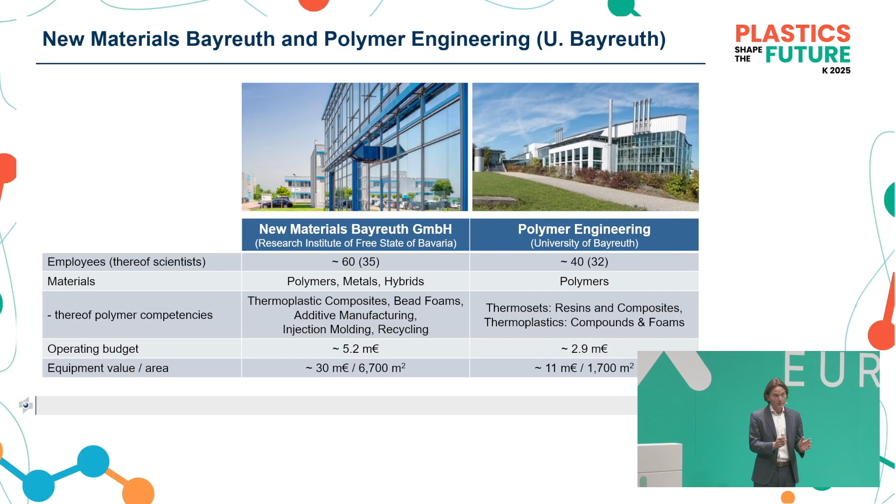And that's, I think, very important, at least to understand each other's language. So before getting started, you already mentioned that I have different roles in Bayreuth. One of the roles, I'm heading the Department of Polymer Engineering, a chair at the university with about 40 people. But I'm also CEO of the company New Materials Bayreuth with about 60 people. Both research-driven, and sustainability plays a quite important role here.

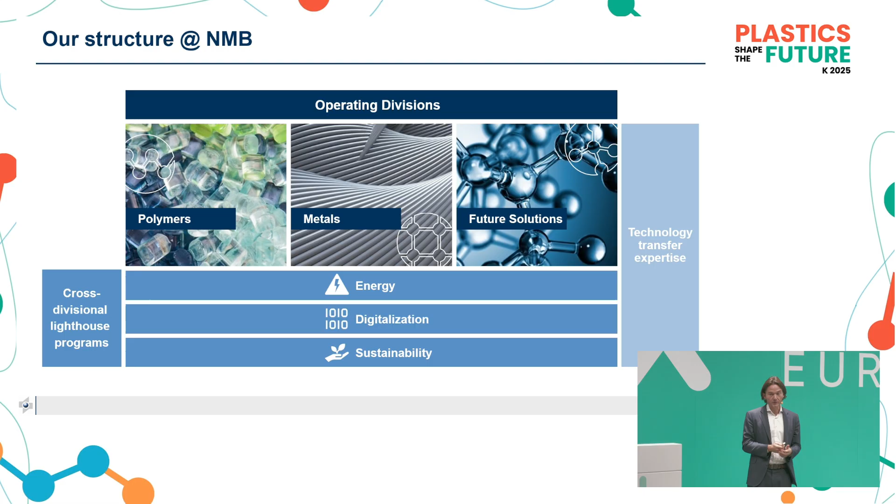An important one is that we organize ourselves in material classes, also including metals, by the way. But digitalization and sustainability, circular economy are across the different materials, because often in applications you have multi-materials. And that's why it's needed to have that general overview. We are not doing research just for doing research, but we are committed to application. We are interested always to apply it later on so that our customers, our partners can earn money.

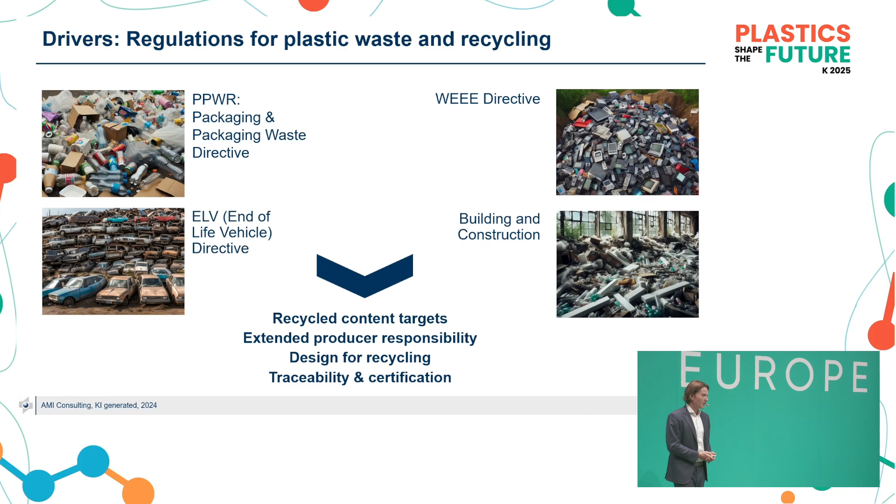But now let's step into the topic of sustainability and circular economy. So what are the drivers? And I think all of you are aware of it. A very strong driver is regulation. There are different regulations, directives in place or getting into place, which demand for a certain share of recycled product, for an extended producer responsibility, for design for recycling, and so on. Without regulation, we would perhaps not discuss so intensely about the topic of circular economy. But there are also other drivers.

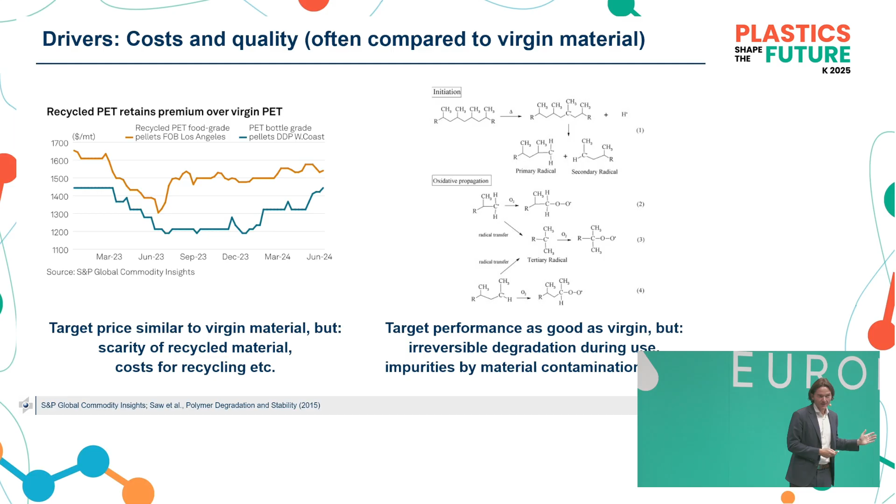The first one is quality. Can we afford to reduce the quality? No, we can't. So it should be at the same quality as before. But we all know that when you're recycling a material several times, due to degradation, the material properties might decline. And the other one is, for sure, the most important material characteristic: costs. Ideally, you would have, at a certain quality, virgin material quality, the identical costs. Due to scarcity in the market, often we see that recycled material is more expensive than virgin material if it's good quality. And that is also an issue which demands for solutions.

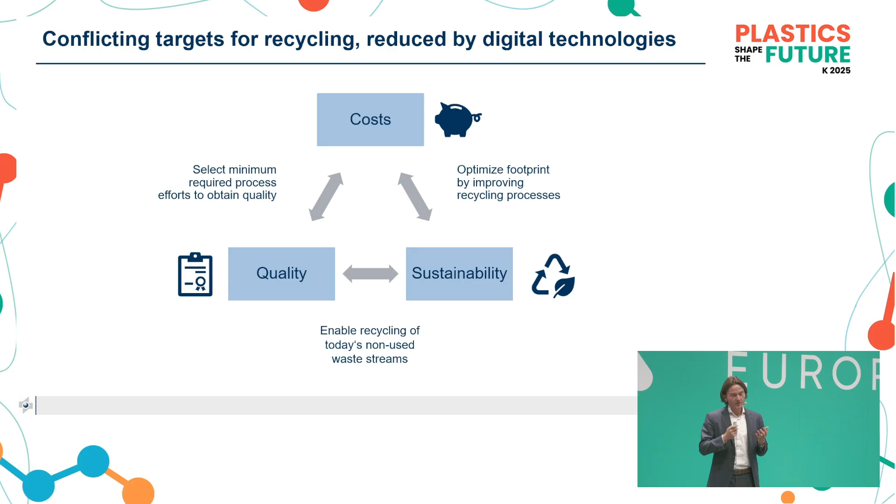So summing it up, it's basically a triangle of conflicting interests: quality, costs, and sustainability. Digitalization can help here to overcome these conflicts and to guide the way to a cost-efficient, high quality, but also sustainable future.

Mentioning one topic here, a similarity check. We have an additive manufacturing plant where also circular economy plays a quite important role. So it's a kind of playground for understanding what is going on at a larger scale. What do you do in additive manufacturing?

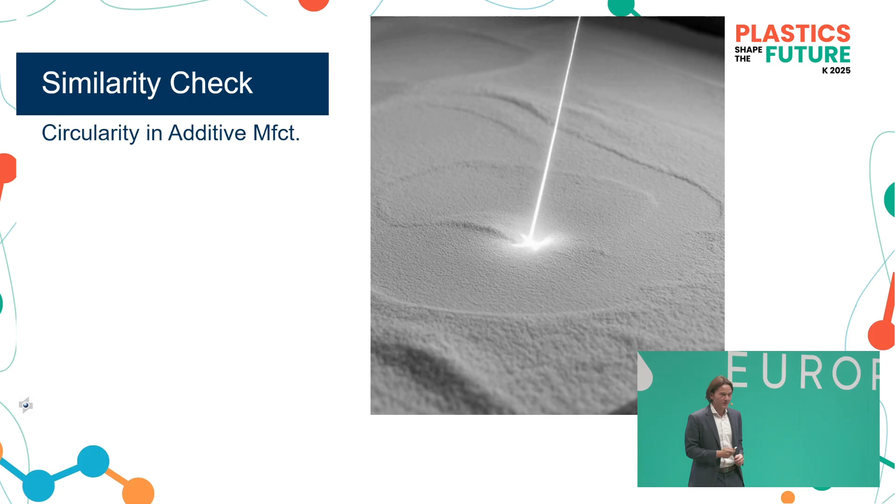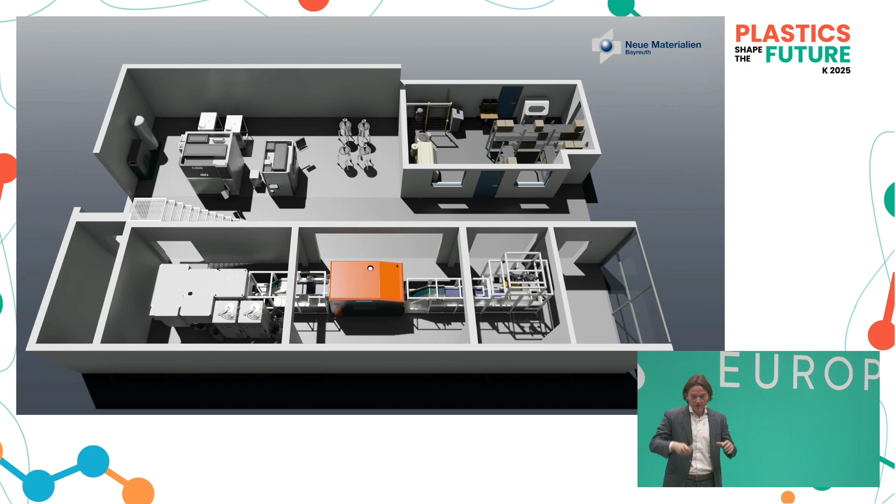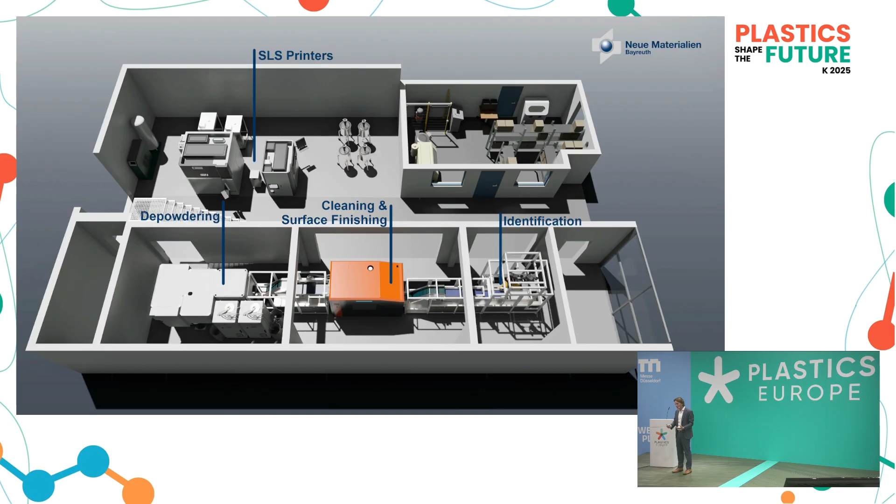Basically, you have different steps. So the upper left corner, that's the printing stage. And after the selective laser sintering, you have to unpack the material. You have to get rid of the powder, which is all around, in order to finally clean up the material. 80% of the material is still powder. It has been processed once. It has changed its characteristics, similar to recycled material. And the question is here, how much material can you feed back in order to be cost efficient at adequate quality?

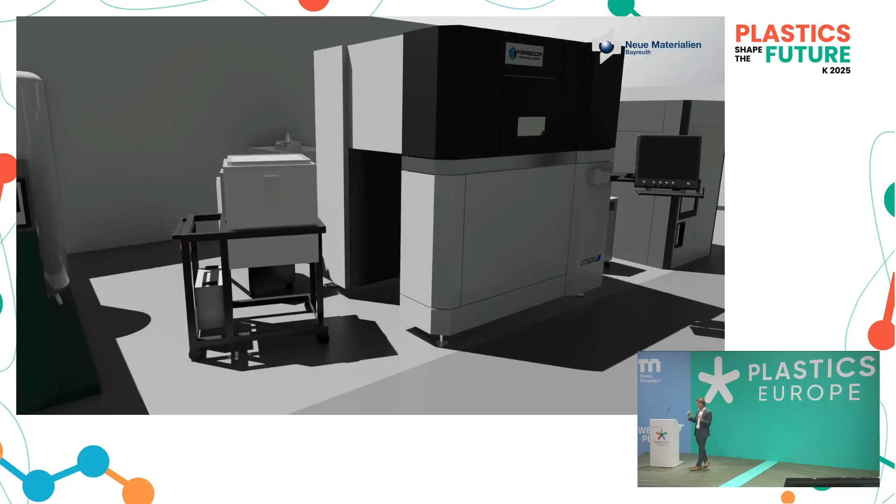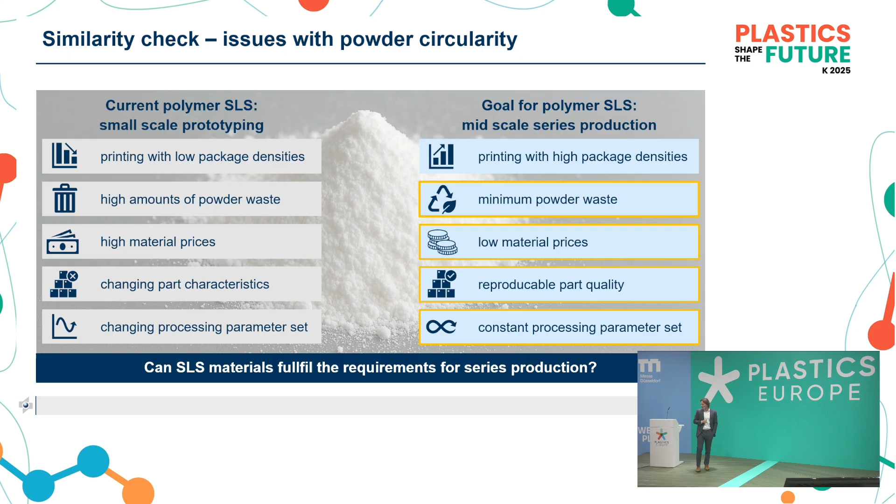So here you see some examples. That's the powder sintering stage, and then it enters all the additional steps. If you check what is important, what is the goal here? Minimum powder or material waste, low material prices, reproducible quality, constant processing parameters, so there's a lot of similarities in.

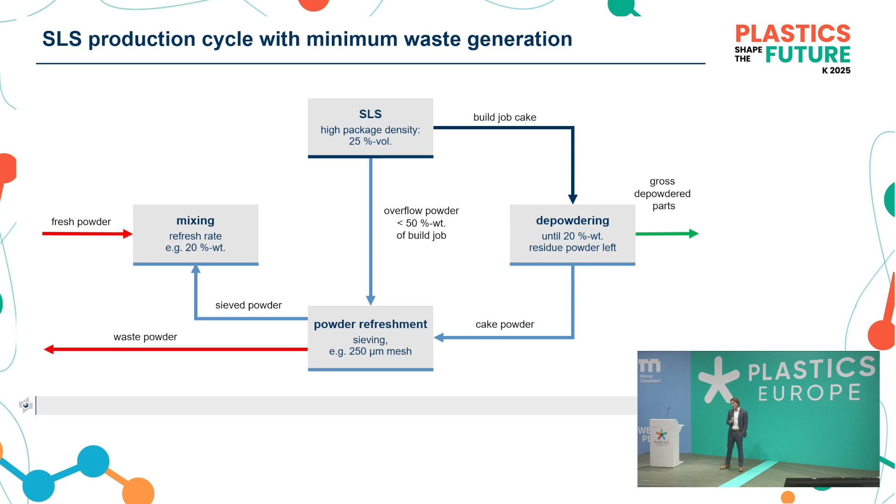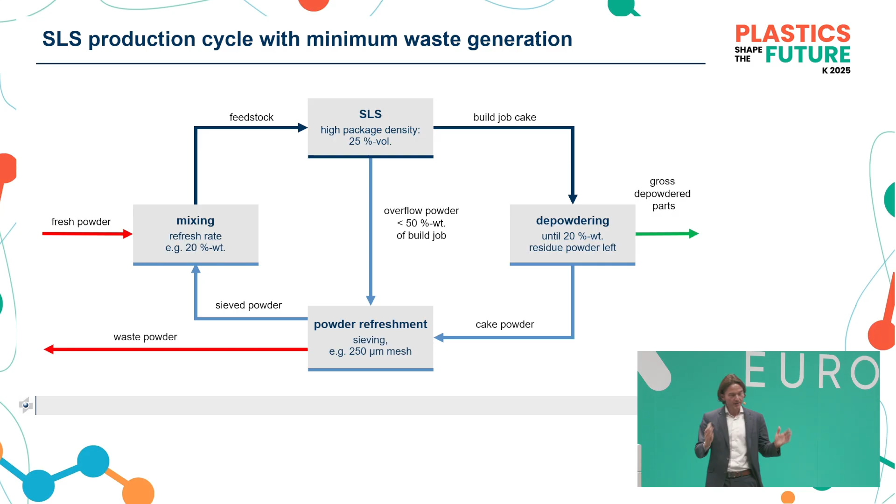And if you check the complete cycle, you see that after the process, you need to depowder, you remove the parts, you get the residual powder, you refresh it, so you add some additional fresh powder. Some of the material can't be used anymore, so it has to be discarded, in order to finally end up in the circle again to get new feedstock. So if you would map a similar picture for plastics recycling, it would be identical. So here at a small scale, we can learn what it takes in order to manage that process.

We have heard before that data is a quite important one here. It's both offline but also inline data. And here you see an example of all the elements you need to measure in order to steer that laser sintering process correctly.

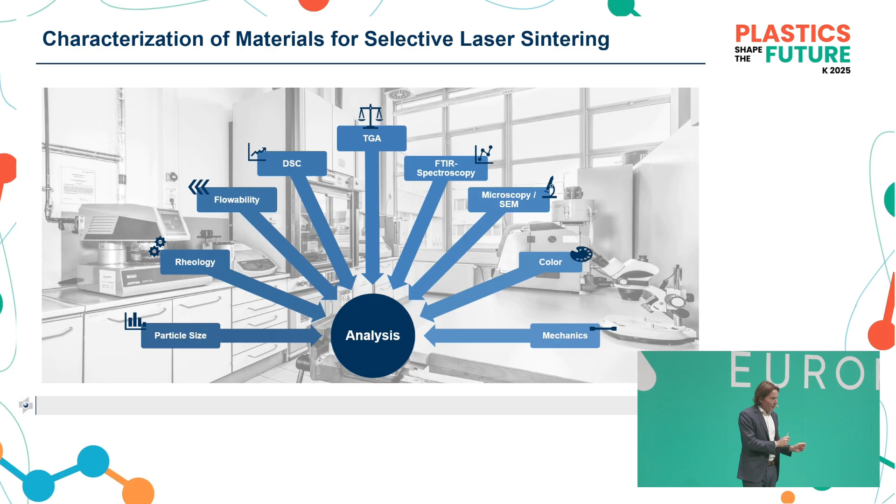Let's now switch back to the topic of circular economy of plastics in general and how digital and circular can team up and build a strong team. Getting back to the topic of data generation first.

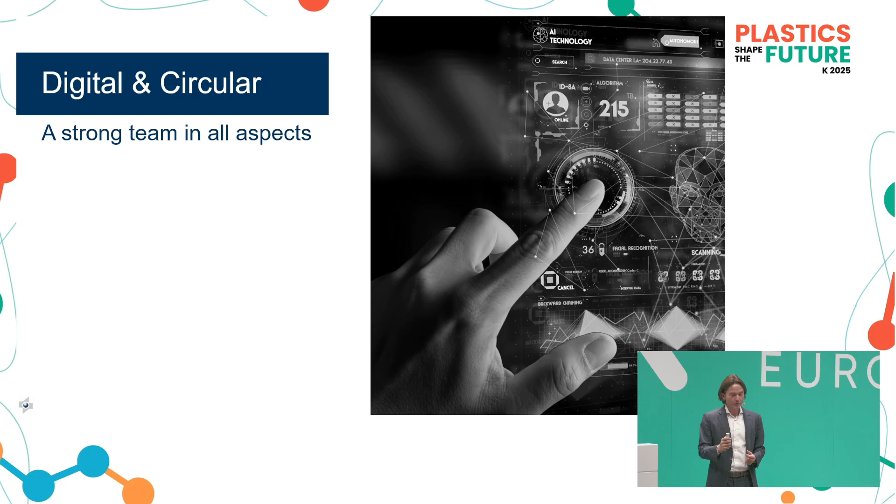What do we need? We do need process data: extrusion, compounding, temperatures, you name it. Material information, and we will have a follow-up talk from Andreas Wolny from BASF together with Bennett Brenken from Reifenhäuser on the topic of digital product passports. It's offline analytics, DSC, GPC, and so on. We heard a talk from Netzsch this morning. And it's inline and online data. Inline and online data is particularly interesting because it allows you to, at line and in real time, control processes and analyze quality.

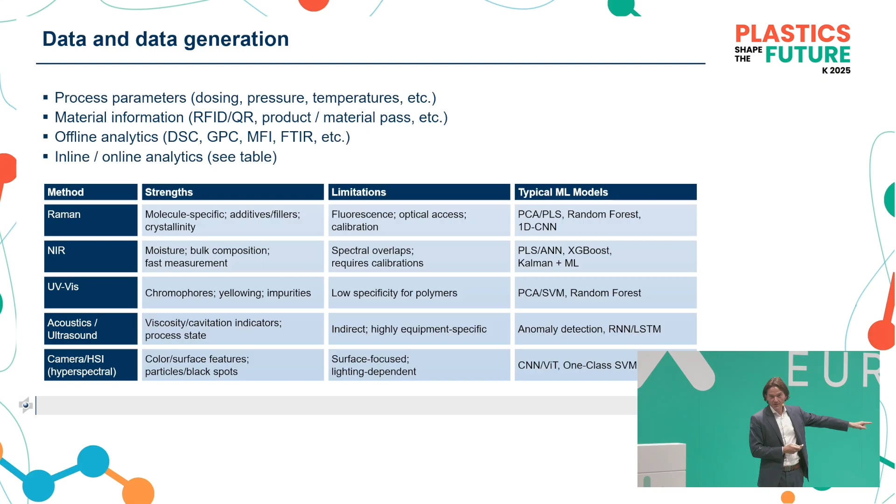Here is an excerpt of what kind of technologies are available, what they are used for, and what the limitations are today. In the last column, you see that there's a lot of machine learning techniques already present.

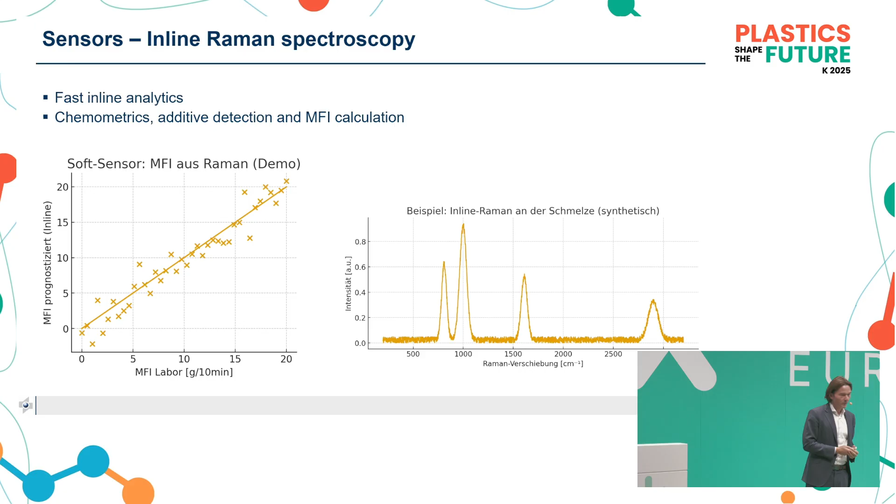Just as a first example, inline Raman spectroscopy is available and very fast. What can you do with it? You can do chemometrics, so analyze the composition of materials, detect additives, and calculate an inline melt flow index. That's something quite valuable if you have it. Here you see the experimental and the predicted data.

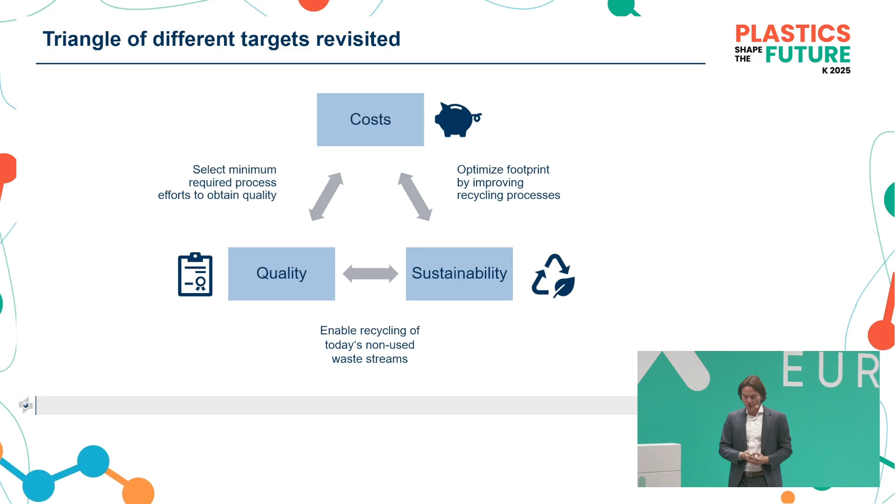So let's now review that picture of cost, quality, and sustainability, and check what we can do along the line. What we haven't talked about yet is that there isn't just one recycling path which is absolutely clear to take, but there are different ones.

You may use mechanical recycling via recompounding, repelletizing the material, or using solvent-based processes. You might use chemical recycling, getting back to monomers, or getting back to naphtha and gas. But the question is, when to take what?

You also see there are different steps involved, from collection, separation, to pre-treatment, to the individual mechanical and chemical processes. So different pathways.

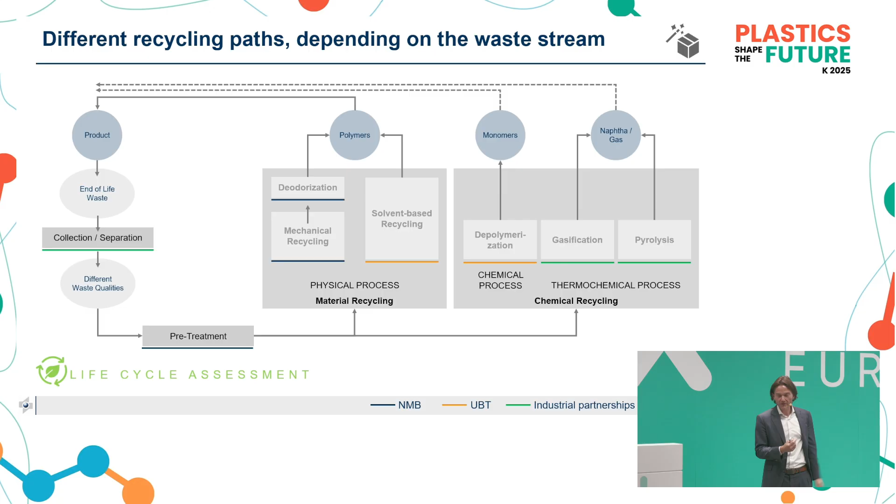I've seen in many studies that you basically optimize at one step only, one individual step. So you can do that, for instance, for sorting.

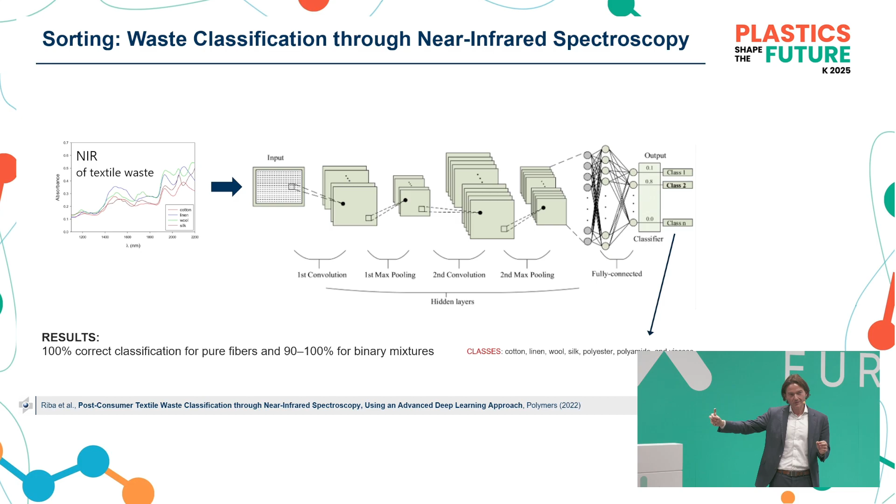You use sensing technology in order to assess the characteristics of the material. For example, here you have textiles, mixed textiles. You use near-infrared spectroscopy in order to sort the material in a very accurate manner. It's a very elegant process and works pretty fine.

The next one, where sorting is also the challenge, is using fluorescence to sort black plastics. Often black plastics are very difficult to distinguish in terms of chemical composition, and fluorescence spectroscopy here can identify the individual materials to make the sorting as good as possible.

You also see these different layers in between. That's a neural network, which basically helps you separate the problem and extract the main features.

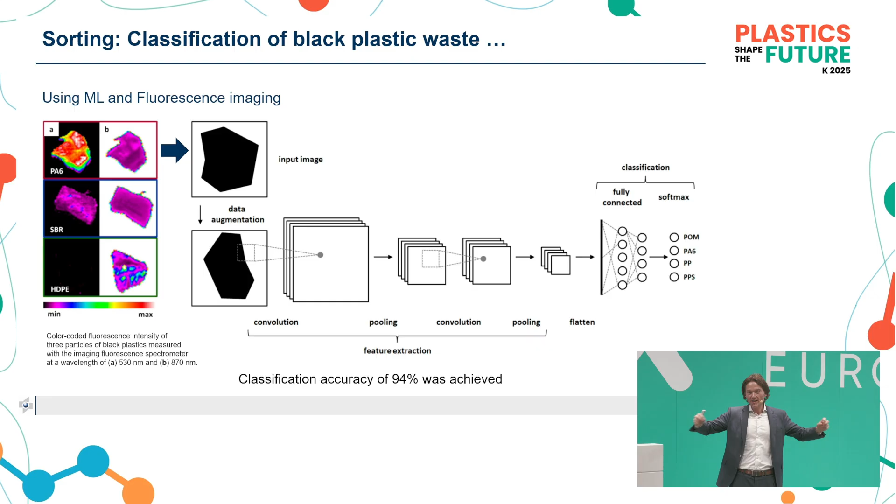It's not only available for sorting, but also at other stages along the line. One other stage, used for chemical recycling, is pyrolysis, to get back to an oily substance.

And just around the corner, you see some examples. Here the question is, how do I get the most yield out of that pyrolysis, particularly when you have mixtures of materials like PET and polyamide 6, which often happen in real applications.

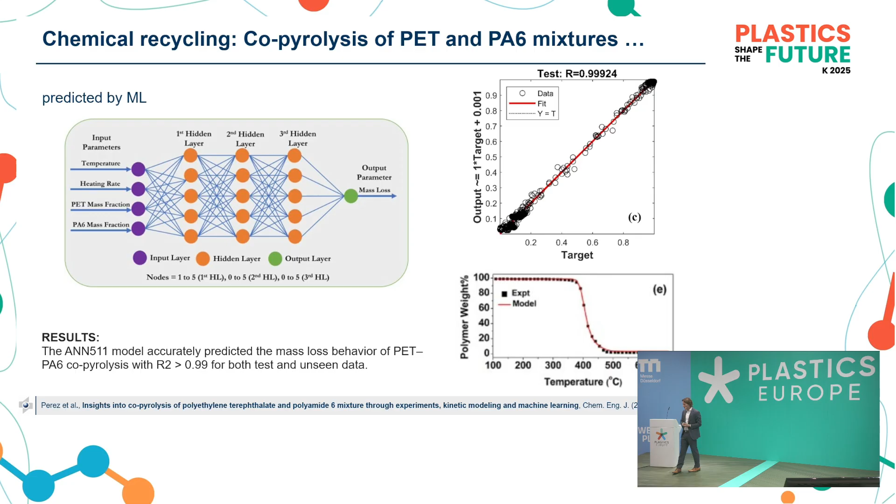So here again, you're using a neural network in order to maximize the output based on the processing parameters which you change.

And the same is true for other compositions. For instance, when you have PET, polypropylene, and HDPE, also typical materials for packaging. So if you want to pyrolyze these materials, it's also very good to know where you can get the maximum yield in these different compositions.

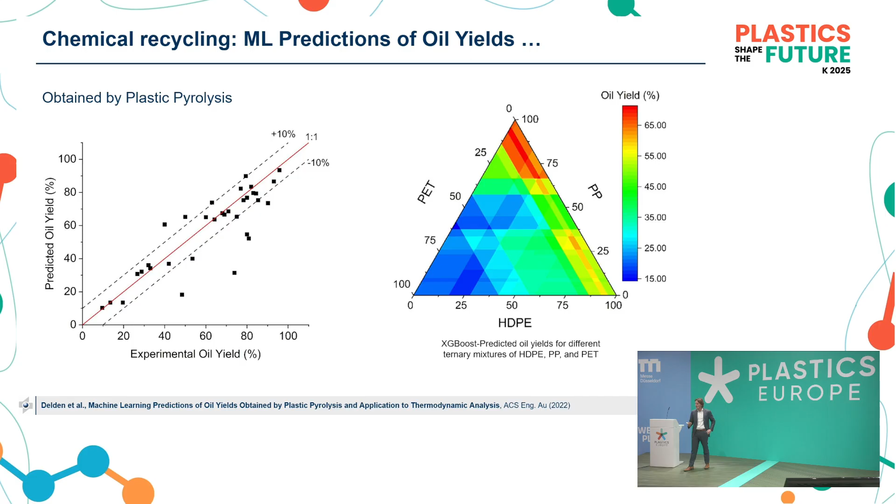All that cannot be done, or at least I can't do it with my human brain, because there might be 100 different parameters influencing that process. You may optimize a process when you have one, two, or three influencing parameters, but with hundreds, it's impossible to think about it. So here, machine learning is a very elegant technique.

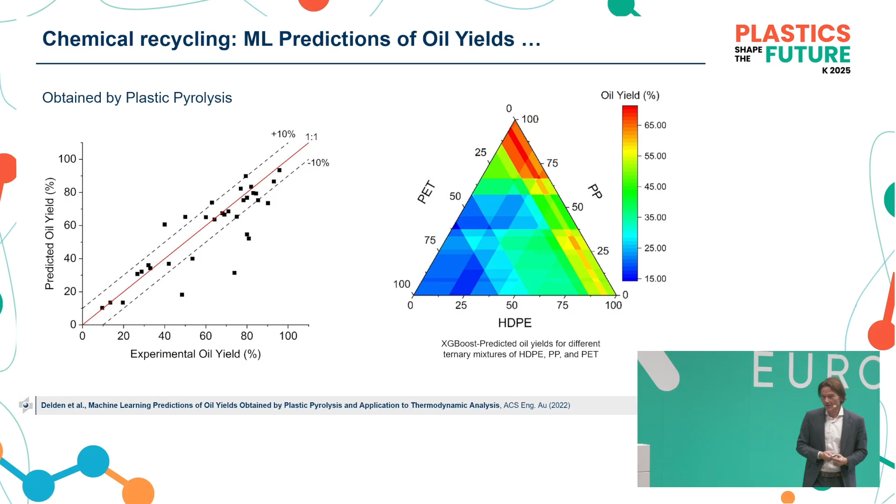Let's now switch to two project examples we are currently running at my facilities in Bayreuth. The first one is about AI-assisted reactive mechanical recycling of PET.

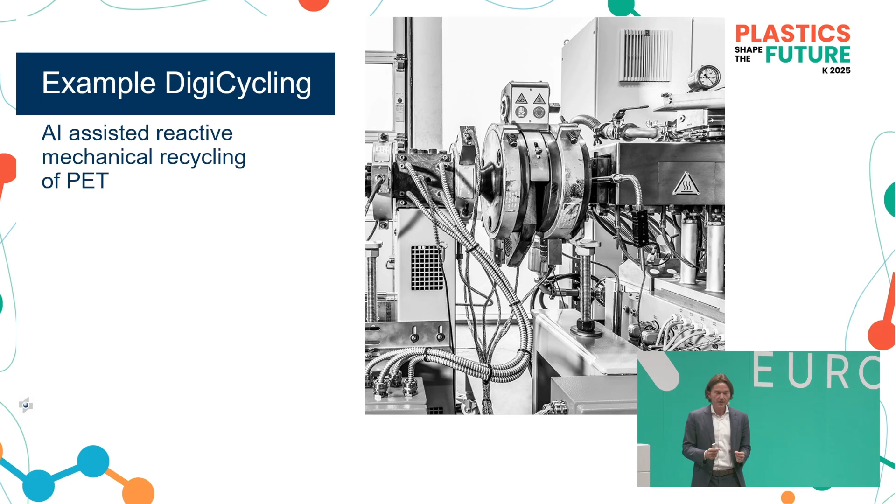So what's the problem with PET? PET is very well known to be strongly available from mechanical recycling. Nevertheless, if you think about the different PET grades available, you have fibers, you have bottles, you have bags, and so on.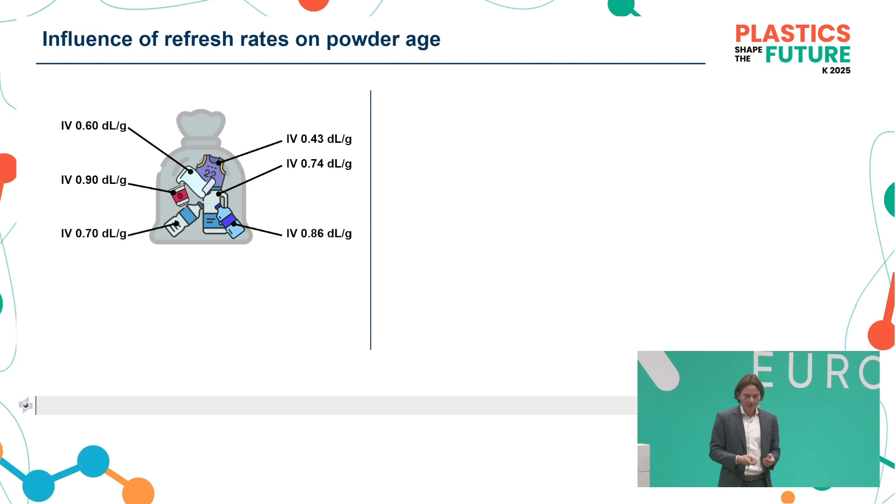All these materials have a different intrinsic viscosity, molecular weight, different characteristics. Often they end up in the same bin. And that's a topic. Besides, you also have batch-to-batch variations.

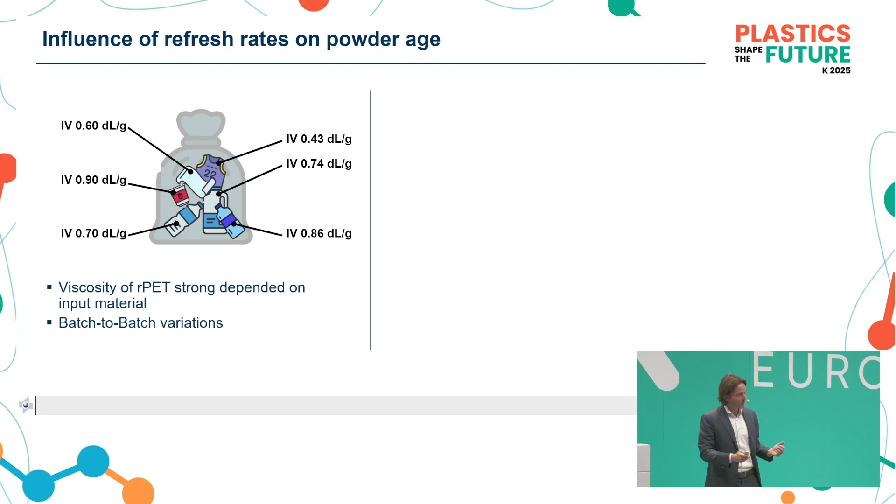In the end, you would always like to have a constant quality again. So you have different mixtures, but whatever you do, you have to prepare a recipe which gives you constant quality. So how can you do that?

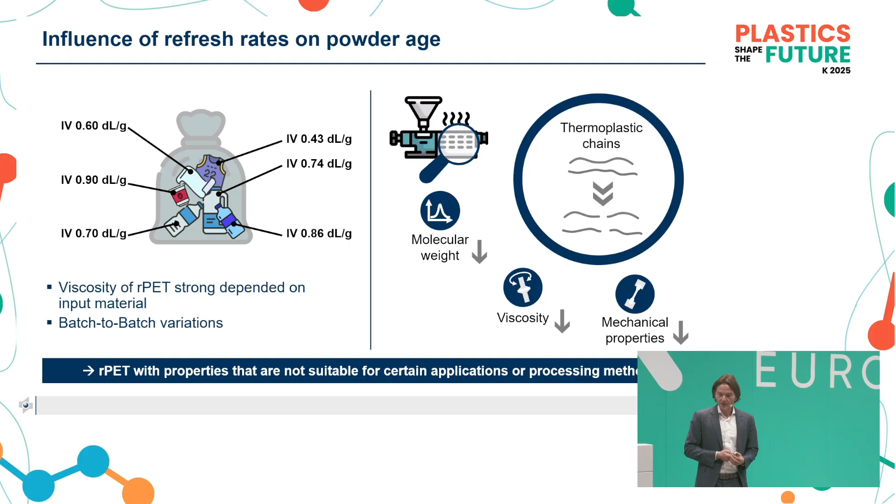Often when processing materials to break down the chains, you reduce molecular weight, viscosity, and mechanical properties, but you can increase the properties again by using chain extenders like Joncryl. That's what we are doing here in our project.

We are targeting the problem not input-driven, but reversing it. So we first define what kind of material we want to have in terms of quality, and we steer the process, the processing conditions, the content of chain extenders, the input sources, so that we can end up with the same quality always. Again, the target is to have always constant quality.

So if you have a desired property, we run the experiments AI-driven in order to see what's the best way to get there.

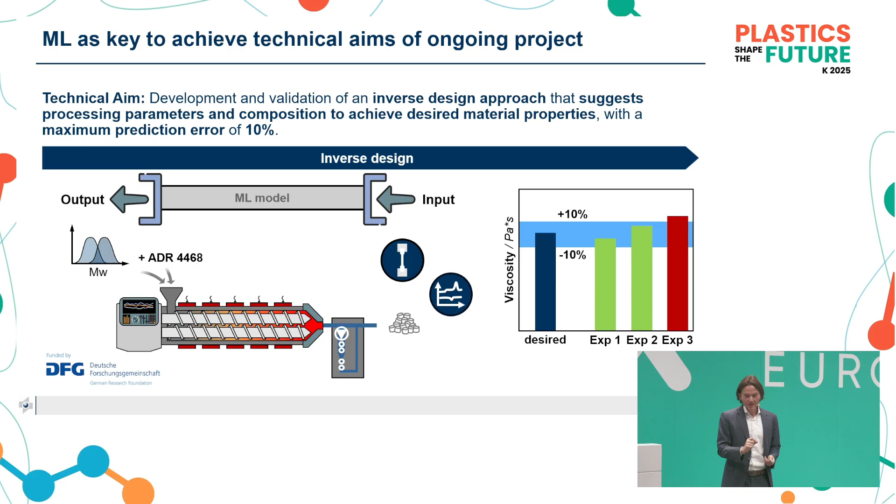I have to make a small comment because we had heard before that big data is very important, the essence, the fuel of machine learning. That's not always true. You can always leverage the value of small data, and one example I'll show you exactly in that case here.

So what's the value of small data? Here you can use the process of Bayesian optimization. You will become some AI experts after the end of the talk. Bayesian optimization is a pretty straightforward technology. What do you do here?

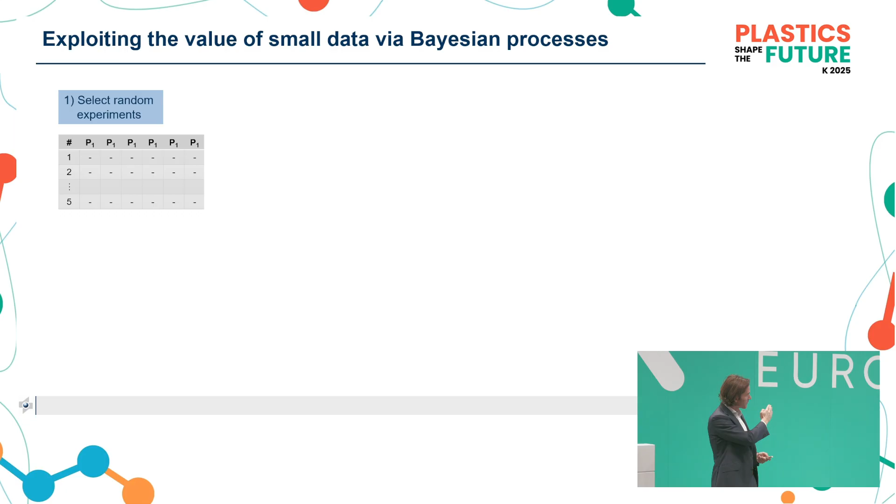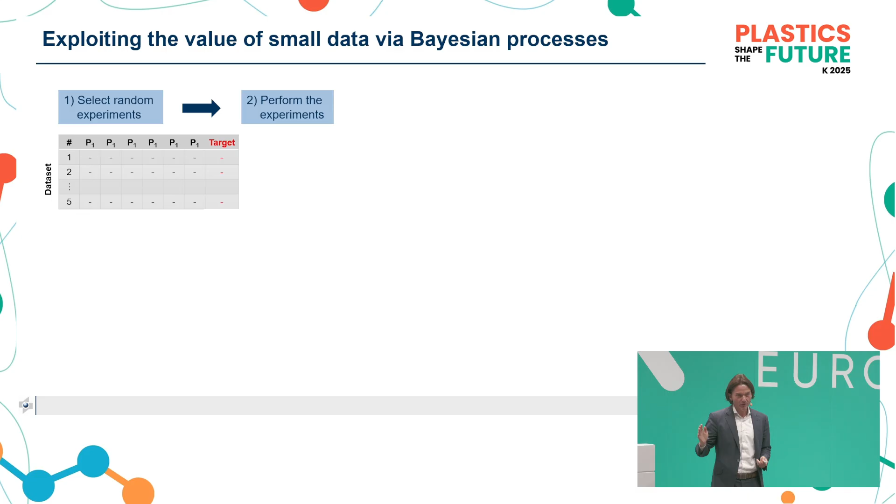You select 5 random experiments with different processing parameters, these different P's. You perform the experiments, you measure your target property, which could be intrinsic viscosity, glass transition temperature, whatever. Based on these very few experiments, you train a model. It will not be a good one, but it's a good starting point.

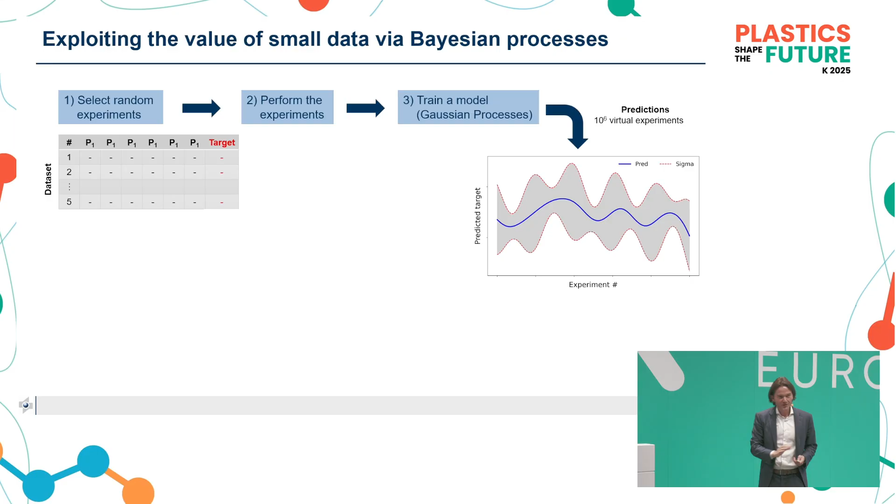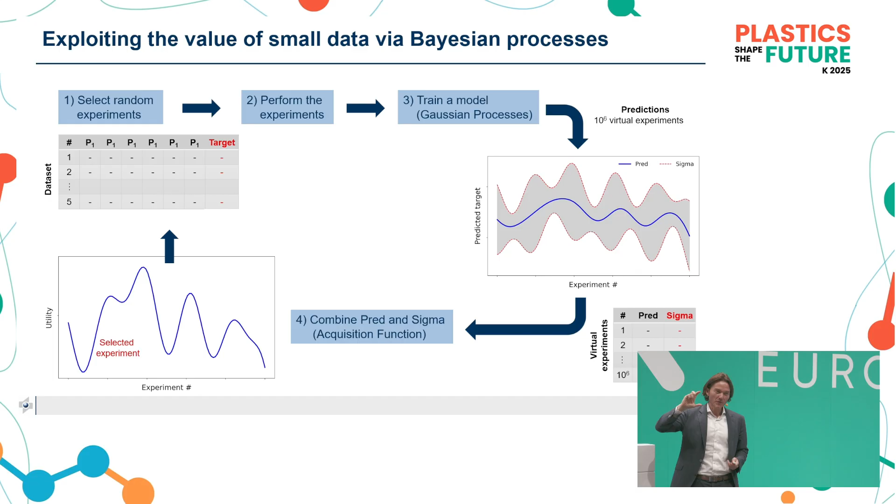Subsequently, you perform virtual experiments. Based on your poor model, you calculate 10 to the power 6 different variations of these processing parameters. You predict also the properties, which you assume with a certain uncertainty. You evaluate which trial you have not taken yet gives you the maximum output, making your model better or optimizing your properties. You do the next experiment with a selected set of parameters. You perform the experiment and you loop until you end up with the desired quality of the data or with a high accuracy of the prediction model.

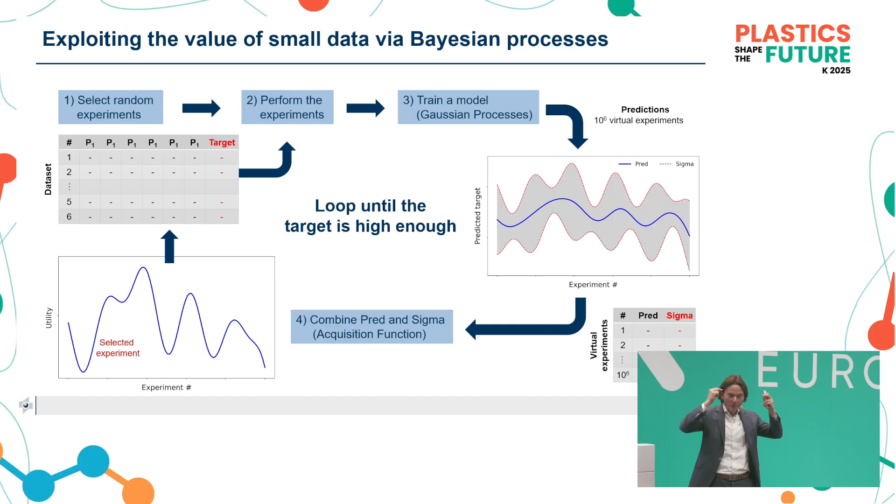So that's what you do also by intuition. If you're standing in a lab doing experiments, you learn from the experiments, you think what could happen next, and then you do the next experiment. And this one is machine learning driven.

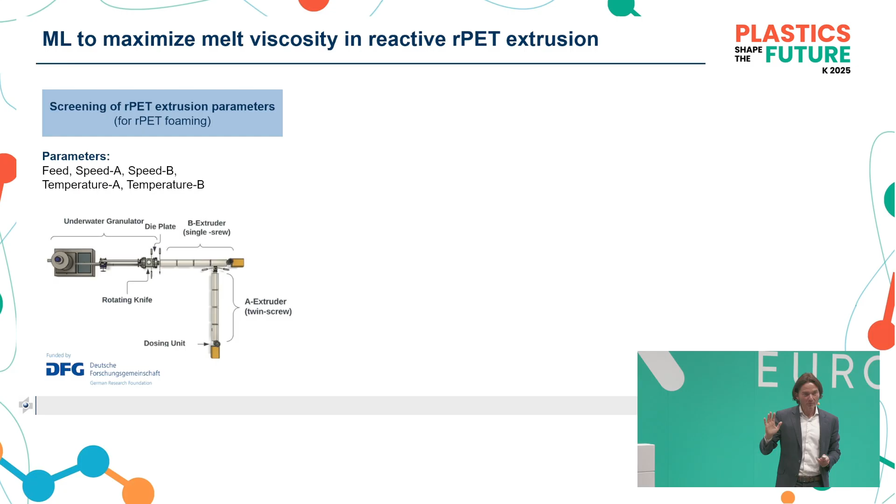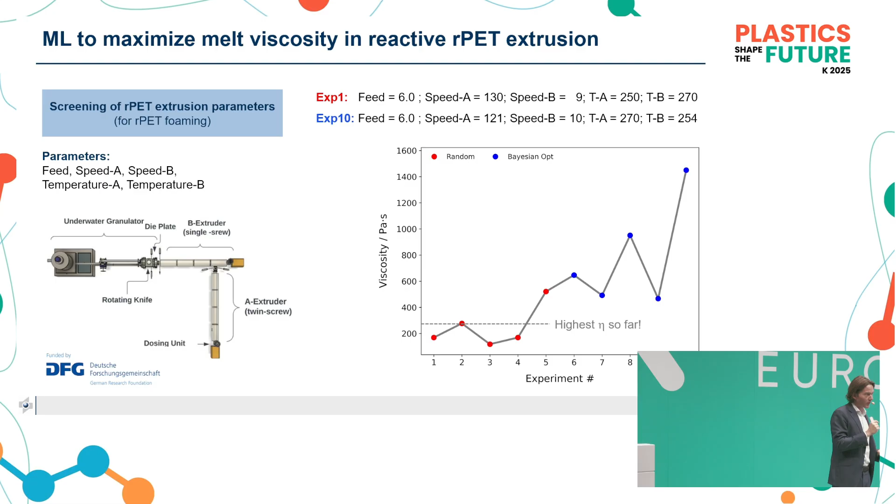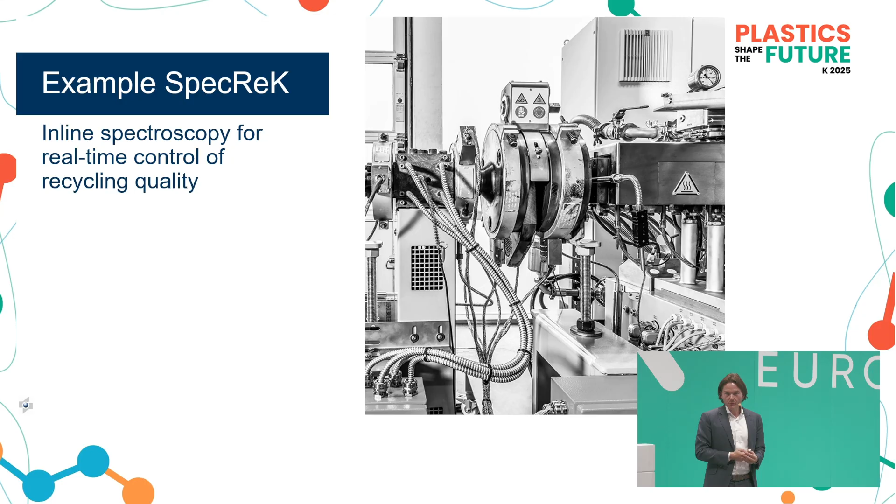Let's now get to a second example, the project SpecReK, which deals with inline spectroscopy for real-time control of recycling. Here we are leveraging the value of Raman spectroscopy. So again, what's the challenge here? It's quantum technologies—Raman spectroscopy is a quantum technology—and here we are trying to optimize for high efficiency the mechanical recycling process in order to have the highest quality.

You also see it's not us alone, but it's a really huge project: ourselves, the University of Jena, TechnoCompound recycling company, Endress+Hauser as the one doing the Raman spectroscopy, and BASF.

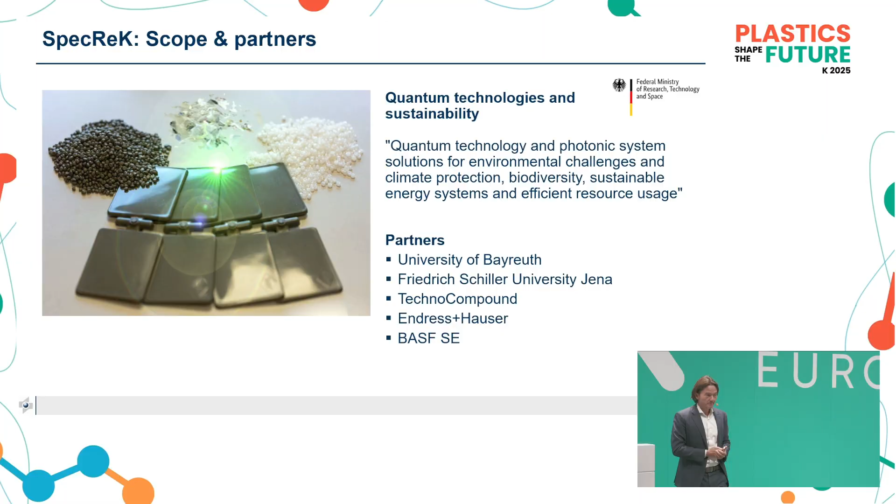So what's the challenge often? First challenge, molecular weight. So you degrade the material, reduce the molecular weight, but it's very challenging to measure beforehand. Can Raman spectroscopy measure the molecular weight of the material plus its composition in line?

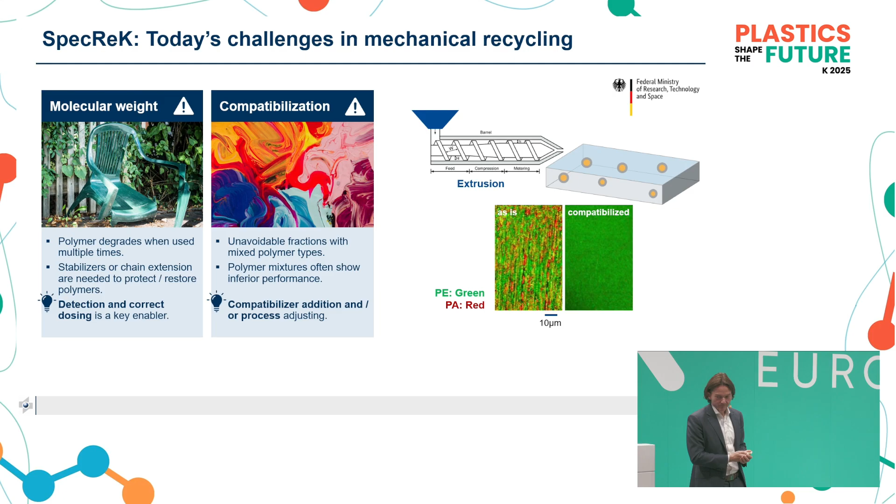The second one is, often you have polymer mixtures or contaminations in the material. You can take action and add compatibilizers if needed, but you would only do that to a certain level and if really needed. So here again, it's about chemometrics—to measure what's the composition of the product in order to finally end up with steering the process.

We are also measuring inline viscosity in order to see how to correlate it, and we are doing a lot of offline analytics to get that combined picture. That will be used not only to control the process, but to autonomously run the process in the end. So you just feed in your recycled material, you know what the composition is, you know your target, and the process is steering itself.

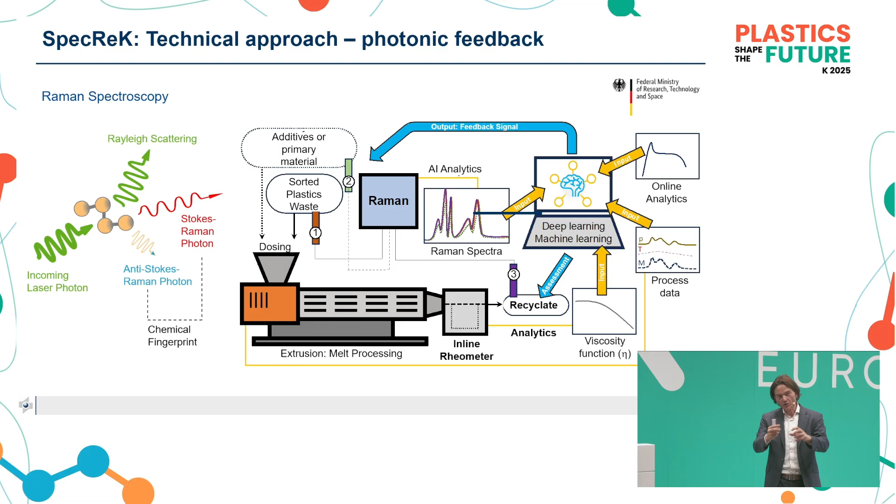As mentioned, quite strong partners. One important element here is to create a database for Raman. So we are artificially contaminating the material in order to have a certain library of compositions, and then we are doing all the experiments, and we are also optimizing the Raman spectroscopy, the measurement technique itself. We are using different case studies—on the polyolefins, the polystyrene, the styrenics, and so on. So there would be different materials included.

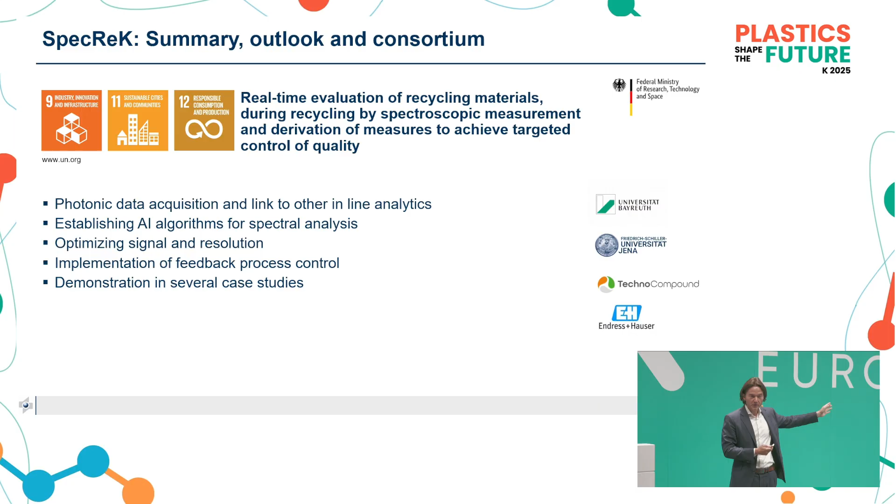So finally, 5 minutes left. We have seen that it makes sense to control the individual stages of a recycling process, but it's also important to keep the overall thing in mind. If you optimize, for instance, a washing process, perhaps that's not needed because the properties will anyway not be influenced. Or it does make sense to invest a little more energy, and often energy is also costs, in order to make a higher quality product.

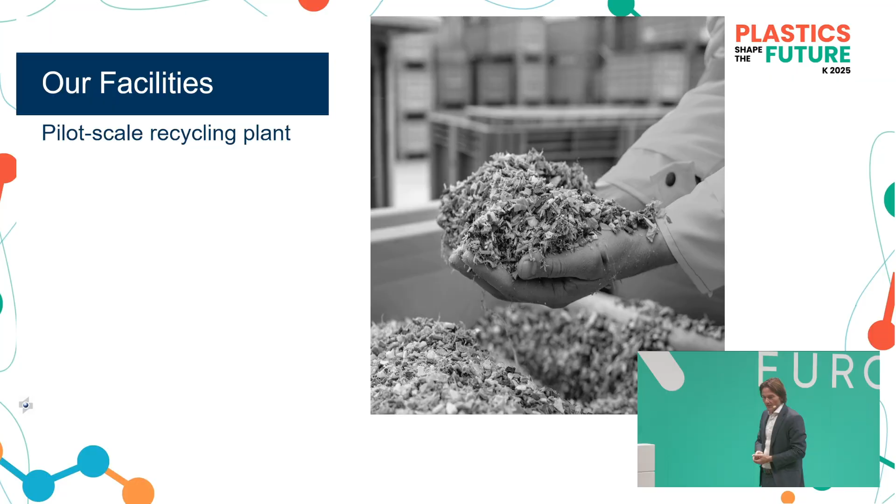So what we've been setting up at the facility in Bayreuth is for the mechanical recycling a full loop, starting from shredding the material, to pre-treating, washing the material, to the mechanical recycling, to deodorization. Some elements I will show you here. One element in particular: when you have very fluffy material, fleeces, foams, and so on, they're difficult to dose, difficult to handle, and difficult to transport. So what you can do is use a pellet press, from Kahl in this case, in order to compact it and make pelletized materials. So that's one part.

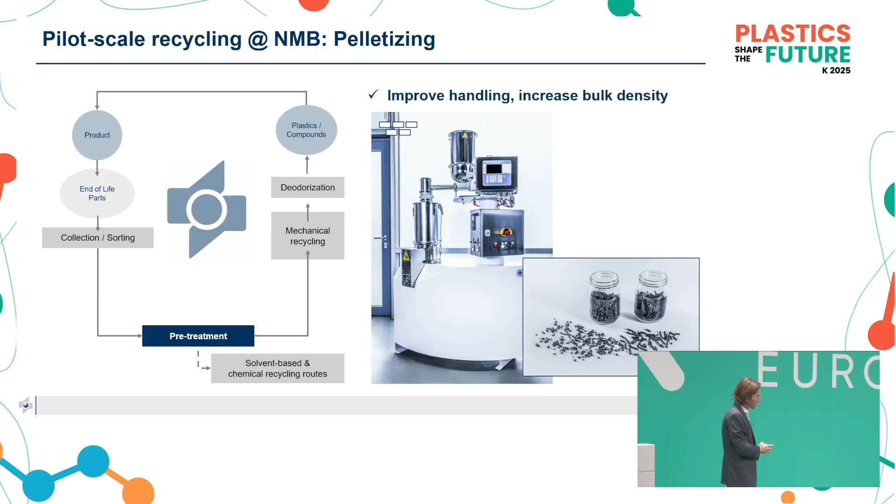Yes, an example you can see here. For PET fibers and for EPP foams, you see how you can compact the material from very low densities, 30 and 40, to 300 and 675 bulk densities. So very efficient.

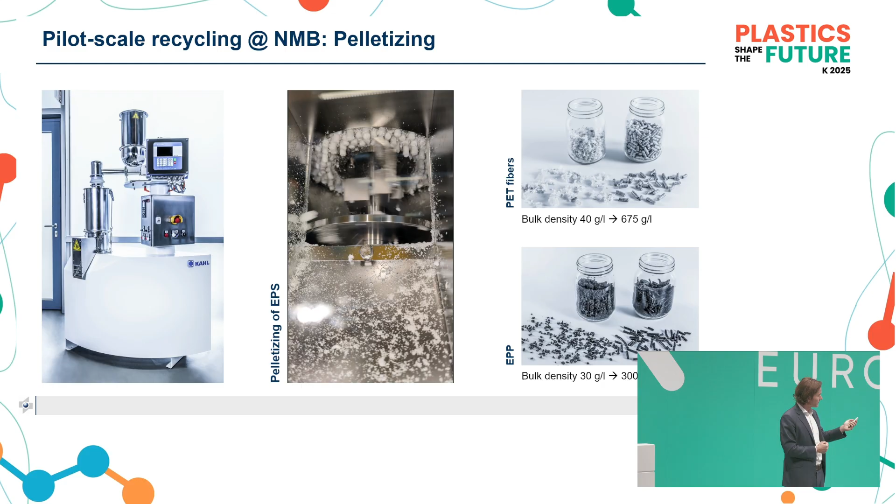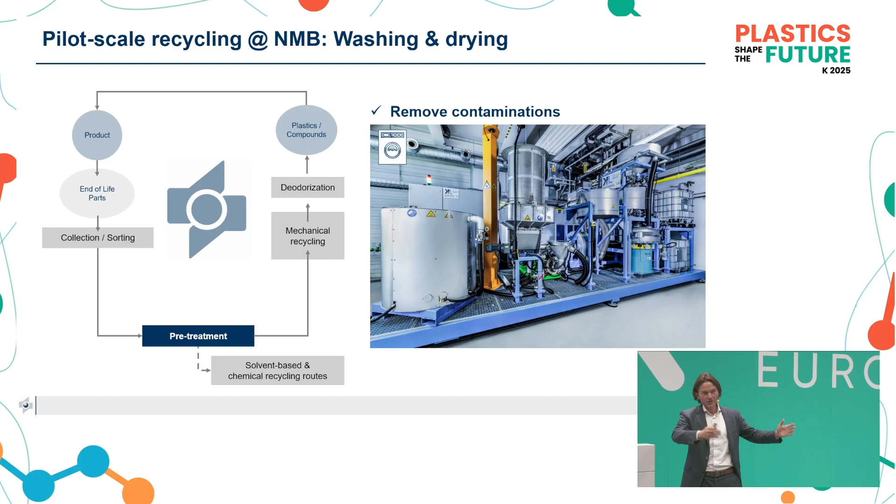The second one is a washing line. So it's not a washing machine, but really, as you see, a pilot plant where we can do washing of the material, hot washing, cold washing, drying the material again. But the particular and most important step we are doing here is shown here.

It's a friction washer. The material enters a very small gap, and you can efficiently clean up the material and even remove metallized parts and films or coatings from the material. So it's not only washing, but it's also unlayering material. Very efficient in terms of energy. We've been running that now for several months, and you see that you have savings in terms of energy between 70 and 90% compared to conventional washing technology.

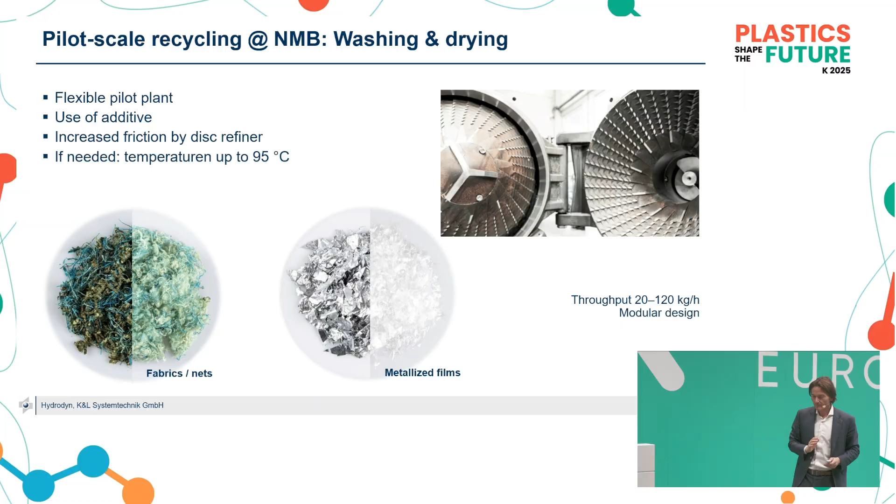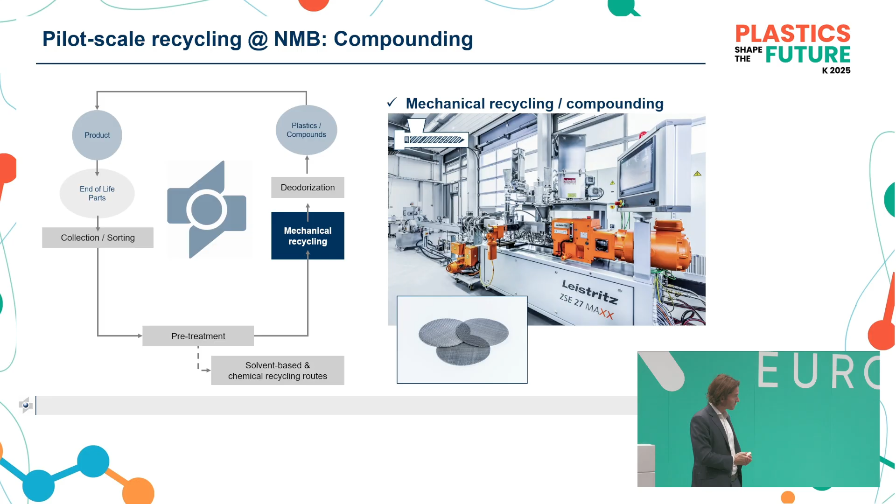If you have the pellets, then you need to recompound. I think that's a well-known step. You do twin screw extrusion in order to recompound the material to get pellets again, or also to filter out materials with different meshes. And finally, odor is a topic in the industry, as we just heard before.

We have combined all these steps. All data along the chain is digitally available so that we can assemble all the information all along the lines in order to really get the most out of it, to control the process in terms of what quality we need, at which costs, and at which carbon footprint.

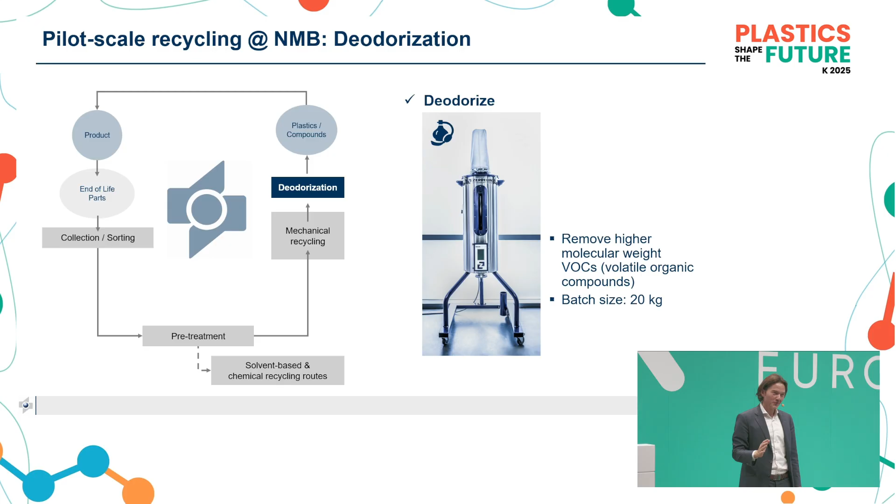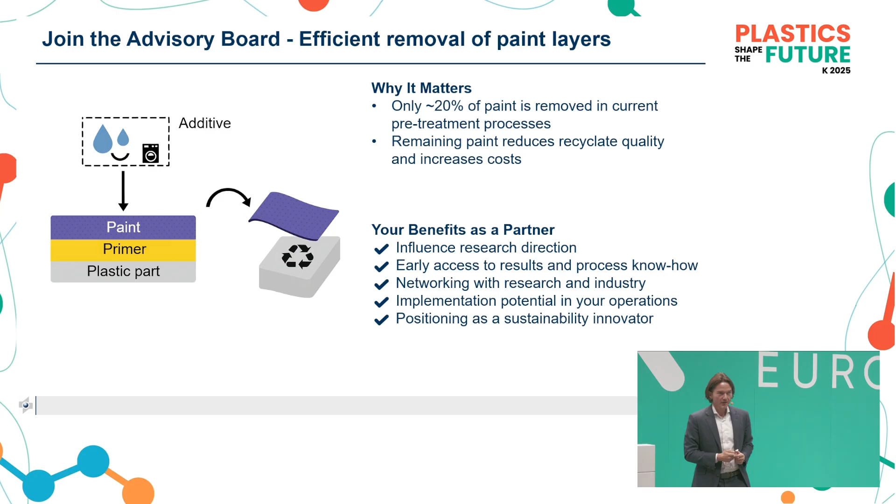For instance, by sorting the material in an efficient manner, which helps you in terms of the quality. You may also use new technologies and reduce the energy input into these different processes. That helps you reduce the carbon footprint, making it advantageous not only in terms of regulation, but also in terms of the carbon footprint of the material, because you don't want to invest more carbon than with a virgin material.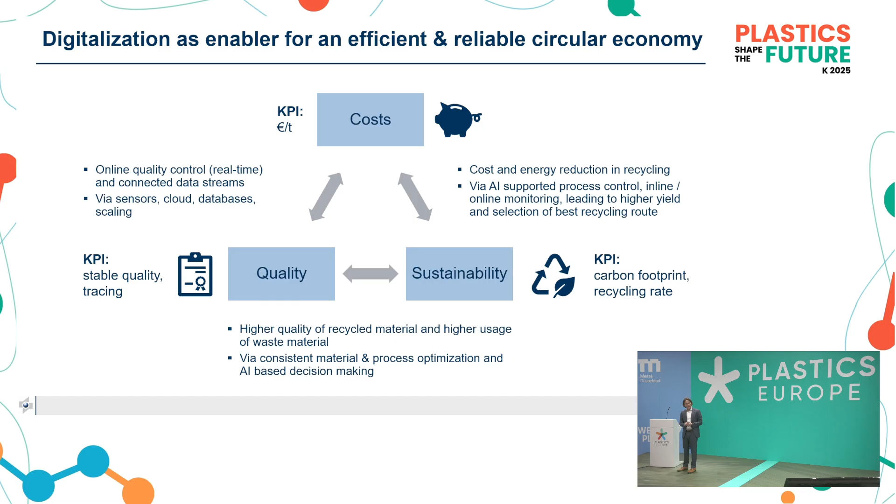And finally, also the topic between quality and sustainability. Having a constant quality is quite important, and this goes hand in hand also with the digital product passports, which we will hear about in the next lecture. So thank you for your attention.

Holger, thank you so much. Are there questions from the audience?